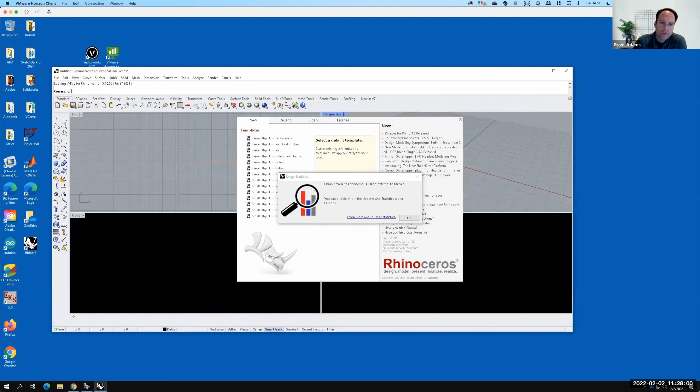Perfect. Now for this file, we don't already have a predefined template, so we're actually going to start with a brand new file here. Let me close everything up, and I'm going to dock my VRay right there at the top, and let's go ahead and maximize that.

On this brand new file that opened up by default, if I look down here at the bottom, I can see that it's set to be in millimeters. So that's not the unit I want to be working in, I want to be working in feet and inches. So I'm going to go up to the Tools menu and go to Options. Tools and then Options.

And I'm going to look for units. There it is right there, units. And I'm going to change to inches. Once that's changed, I'll go ahead and say OK. And now my scene is in inches, so when I start working, I'm going to be working in inches.

So we're going to set up this primary view, and what I'm going to ask you to do is work in the perspective view today. So I've double clicked on the perspective viewport, and that's what I'm seeing here. I want you to create a composition of 5 objects.

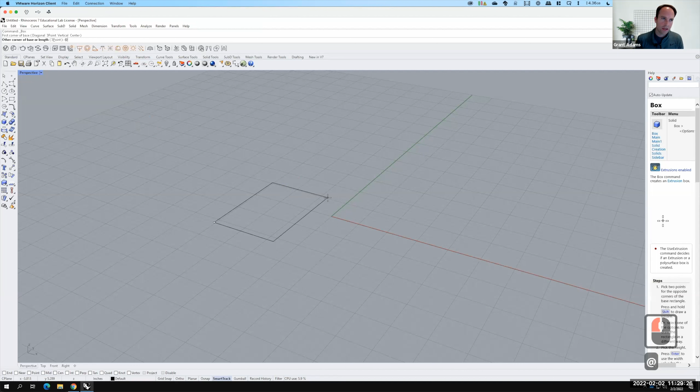These objects don't need to be anything particular, but let's start with like a cube. So I could use my coordinate system, I could say at 4 feet, 4 feet to create that first cube, and then we could say maybe it's 4 feet tall, like that.

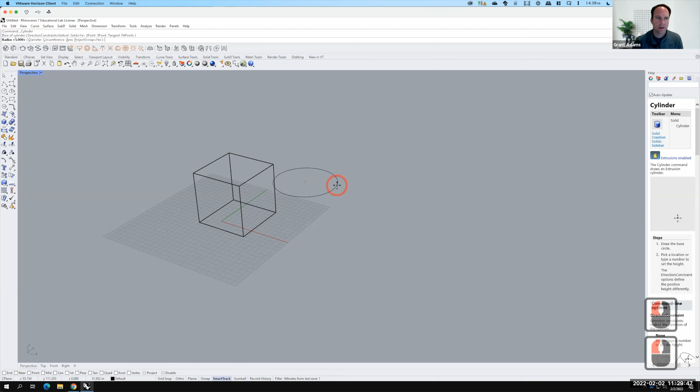And then maybe I'll create a few other objects. I'm just using these solid primitives. So I did the box corner to corner. Maybe I'll do a cylinder next. So let's click maybe here as our center, let's do a radius of 2 feet, and we can do a height of, I don't know, 6 feet.

And then I can come over here and choose a different, I don't know, let's do a sphere, and we'll do a radius of 3 feet. And then maybe I'll create, let's see, what else do we want to create here?

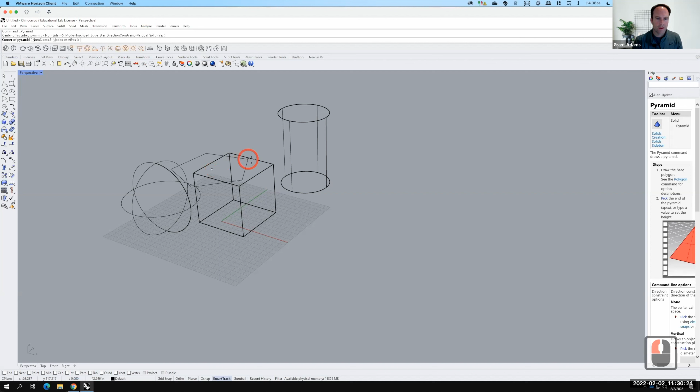How about a pyramid? Sure, why not? Now in pyramid, I can choose the number of sides, right now it's set for 5. I could set 4, depending on what it is that I want. 5's fine, and we'll put this one back here behind our other objects, and then we'll give ourselves a little bit of height there.

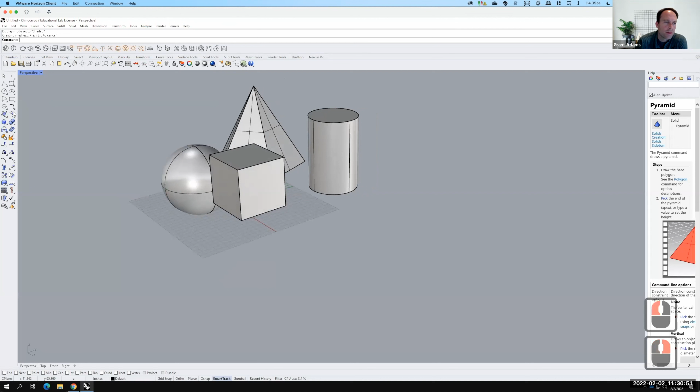Now if you're struggling to see what's actually happening in this scene, it might be helpful to look at this as a shaded view instead of a wireframe. So I can change that by clicking on the arrow next to where it says perspective, next to the viewport name, and I can change from wireframe to shaded. And so that gives me 4 objects. Let's just do another box over here, we'll do a longer, skinnier box.

And there's my 5th object. What I want is to arrange these so that I have a nice little perspective. Notice that my sphere is actually sitting low, so I might want to move that one up. So I can take this sphere.

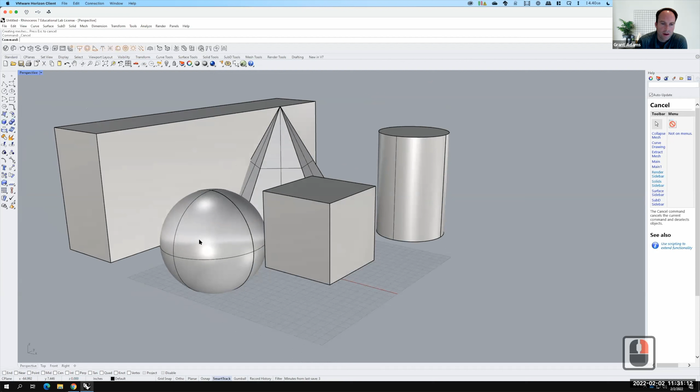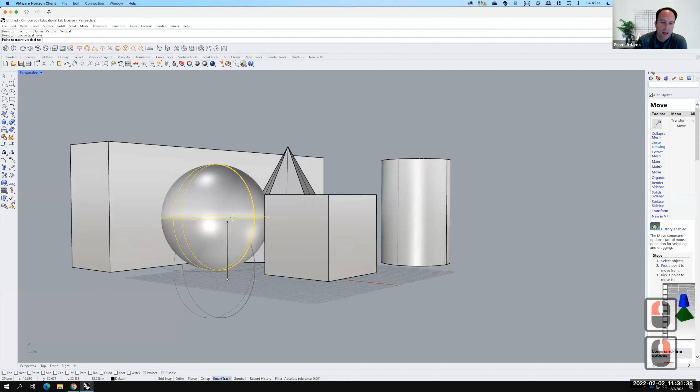Now, if I just go to transform and then move, it's going to move only in the X and Y plane, not vertically. So when I initiate the move command, if I look at my command line, one of the options is vertical. If I click on vertical, I can then click and move it up in space, moving it vertically rather than in the X and Y plane.

So there it is. Now I'll just adjust my view a little bit. We'll do something like that, and that'll work. Before I do my rendering, I'd like to save this view so that I know this is the view I'll always have when rendering. Actually, let's move this over just a little bit, maybe like that, just adjusting my composition.

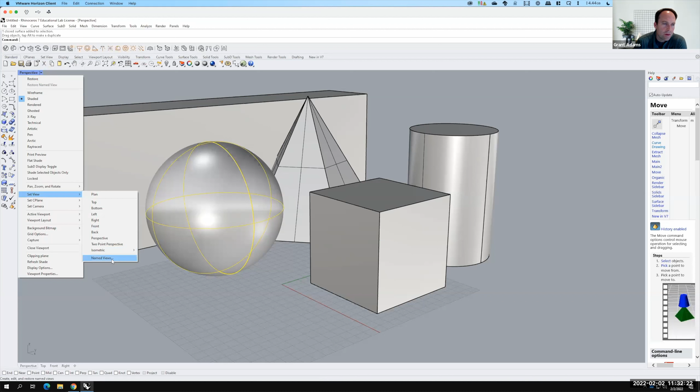I'd like to save this view so I can come back to it again. I can do that by coming up to the viewport name where it says perspective, and click that down arrow. Then I go to set view and then named views. This brings up the named views dialog box, and you'll see there's the disk icon for save.

So let's save this as render1. I've typed render1 there. I'll say OK, and you'll see that instead of perspective as my viewport, it's now called render1.

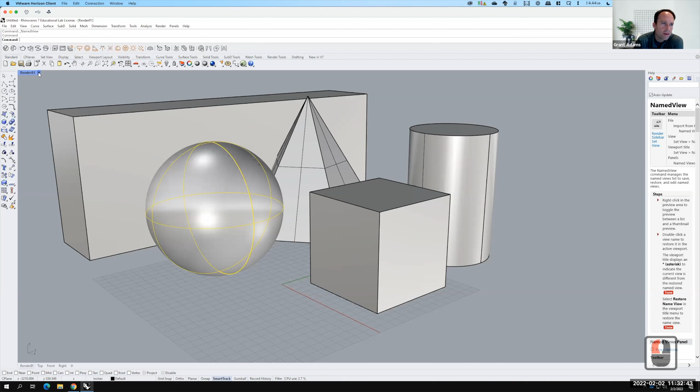The advantage here is that if I move this and then want to come back to render1, I can go back to set view and choose render1, and it'll jump me back to that view. It's just like if you worked in SketchUp and saved a scene there—this is essentially doing the same thing, saving that particular scene.

So what I wanted you to do was create this basic composition of shapes, and we're going to play around with VRay and actually render out these shapes. I can pull back up my little walkthrough here, and we're going to go through these basic setups, then I'll spend a lot of time working through the VRay asset editor explaining what's going on. But in order to get a good rendering, we need there to be some kind of ground established.

Right now we only have our objects. I'm going to look over here at my layers—I've got one default layer. I'm going to go ahead and create a new layer by clicking this new layer button, and we can call this ground, or what I tend to call it, IP for infinite plane.

So that infinite plane then is going to become my ground. I'd like that to be the active layer, so I'll change my check mark so that the infinite plane is the active layer. Then I'm going to look in my VRay tools.

When I look up here in my VRay tools, I'm going to look for a little symbol that looks like a rectangle with 4 lines off of it with a little infinity sign in it. When I click on that infinite plane tool, it's going to create an infinite plane. Oh, look at that—please choose VRay as your current renderer.

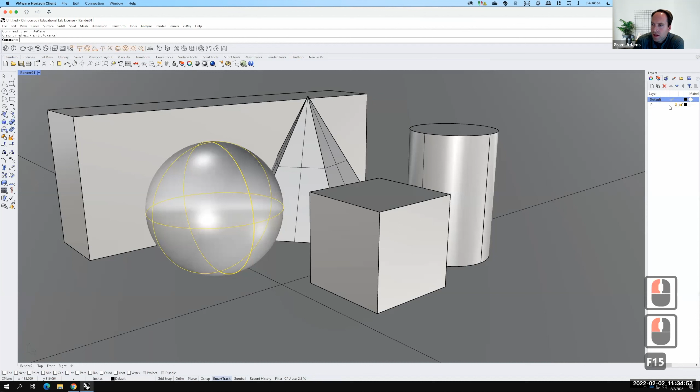Once I have that ground, I'm going to change my layers back so that I'm on the default layer, and set that as my current layer. Then over here in the infinite plane, I'm going to click the little padlock icon to lock it. The reason I lock it is I don't want to accidentally move the infinite plane—I just want it to sit there in the background. So now that it's locked, I can't accidentally move it.

So I've got an infinite plane set up, but I currently have no light in my scene yet either. So we're going to create a light called a basic directional light, available right here using the directional light tool. But I think it's really hard to create a directional light without a little guide object, so what I tend to do is create a box. I could use this box I already created, but we'll make another little one over here.

I create a box, and then when I choose the directional light, I'm going to snap first. It asks me for the end of the light direction vector. Let me turn on my end snap here. I'm going to orbit and choose that point right there, the lower point of my box. Then it asks me for the start of the light direction vector, so I'll choose the opposite corner of the box.

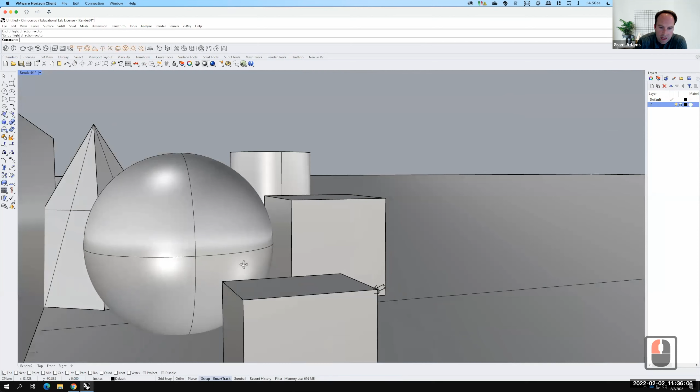What that does is allow me to create that light so it's pointing down toward my scene. If I were to create a light without using that box, I could say okay, there's my start, and maybe there's my end. What ends up happening is I have a light that's perfectly flat against the ground plane, and I really don't get good results out of that light.

So let's go ahead and delete that one. We'll leave this light here in my scene, and then we'll go ahead and delete this square because we don't need that anymore.

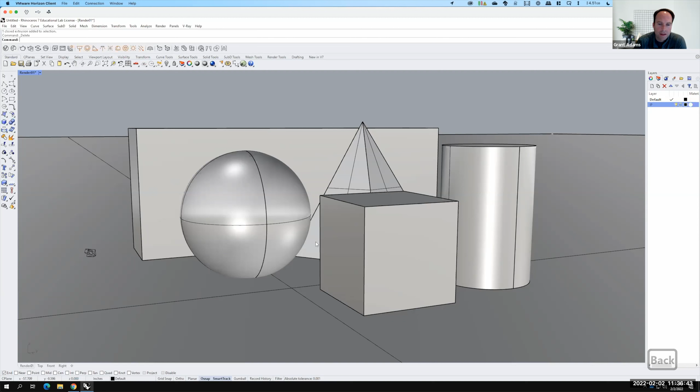Now that I have that and I have my light, we can go ahead and perform my first basic rendering. So if I go to render 01 and come back here to set view, and go to render 1, we'll reset my view to that saved view so they're all the same. I've got my light installed. That's good, and now we can go ahead and do a test render.

Now it's probably not going to turn out very well because we haven't set any options in VRay just yet, but let's go ahead and give it a shot. I'll click on this teapot icon and I'll go ahead and click render. And lo and behold, I didn't have very good results just yet.

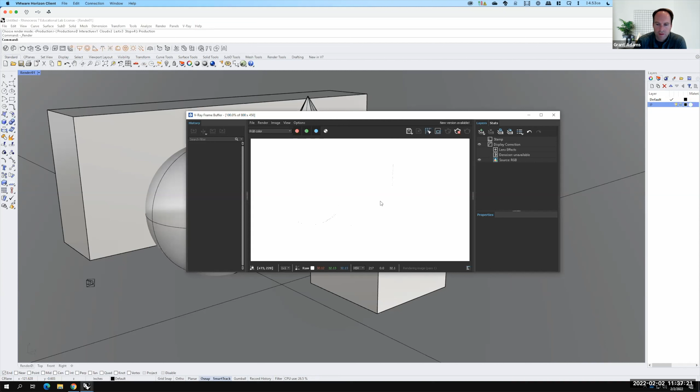So that's okay, let's go in and start looking at the VRay rendering options. What I'll do is click on what's called the VRay Asset Editor, which is this sphere right here, and that brings up really everything that you need to know about VRay.

I have a little daughter who decided to come join me right now, so give me one second to take her back inside. I'll be right back, hold on. Sorry about that, that's the consequences of being on Zoom. I'm sure it won't be the last time.

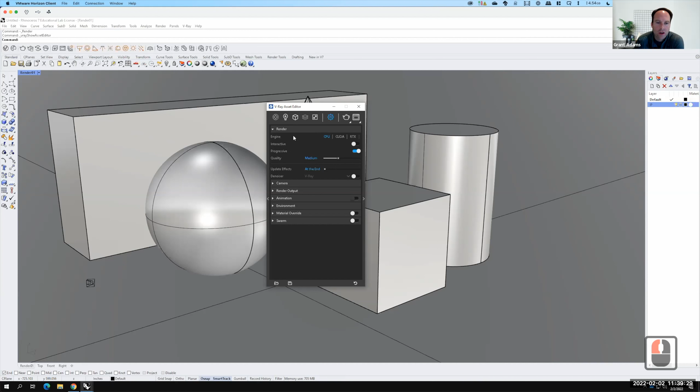So we have a couple different kind of setups. The first thing I want to do is go to the gear icon, and this is going to go through the basic settings of VRay, and allow me to look at what the default options are, etc. If you're ever struggling, sometimes the easiest thing is to just reset and revert to the default settings. A few of you have done that already, so you can always revert to defaults and start fresh on your settings.

These should already be the default settings, so I'm not going to worry about it just yet. Under the first little drawer, I have my render engine, which is currently using the CPU. I'm not doing any interactive rendering, so that's turned off. We are going to leave it as progressive, and my quality is set to medium, which for our purposes right now is just fine. When we get to final renderings at the end of the semester, we may bump that up a little bit.

I can close that little expansion and open up the camera expansion. This is where we control what the camera looks like, how a scene is exposed. This value here, this exposure value, is really the one thing you're going to be changing, and it's going to control how bright or dark the rendering is. I would suspect that if I change this number to about 13 or 14 right now, we'd get much better results in the rendering. Let me show you.

So I've changed that to 14. I'm going to click on the teapot icon.

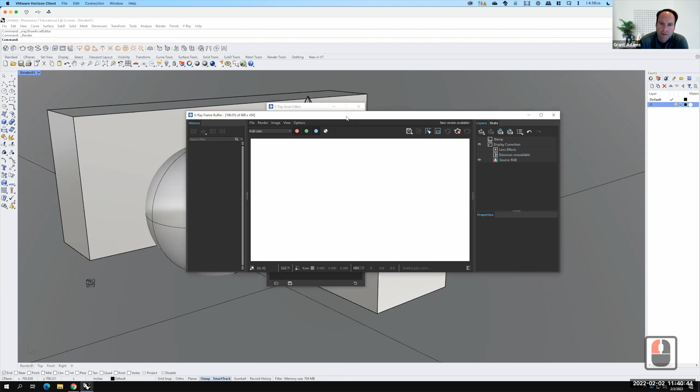And it's still way too bright because I have no materials, but at least now we're seeing some of the shadows starting to appear. So we'll leave that there at 14, and we'll keep coming down here.

I do have the ability to play around with depth of field. We'll get to that much later in the semester.

Let me go ahead and close the camera drawer, and we'll open up the render output drawer. There we go. This is what is actually rendering.

My aspect ratio is set to widescreen. What I tend to like to do is just match the viewport, so what I see is what I get, which is good. It's giving me an aspect ratio of 2000 by 1074. That's fine for our purposes.

It's still going to render pretty fast. Sometimes when you do your renderings, you might want to switch over into custom and then change this image width and height. Let me go back to the viewport and see if I can change it there. Match viewport - yeah, I can still change it there. I can drop the size of the rendering way down just as a test render, but that's when things get long in rendering.

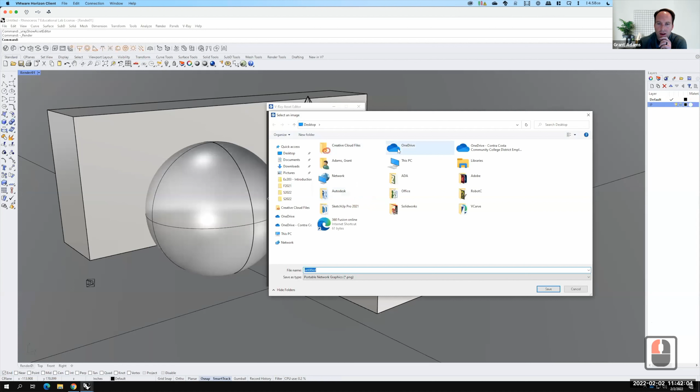The other option I have here is to actually save the image. So I can turn this on, and that would automatically save the image to a path that I specify. I could come over here, go into my OneDrive, and save it into my OneDrive folder. It's not a bad idea to protect yourself, but for our purposes right now, I'm not going to turn it on. We're not dealing with any animations yet.

We're not addressing environment settings yet, we'll get to that. Material override takes away all the materials and gives us just the default material. And the VRay swarm allows us to use multiple computers to do rendering. So those are things that we'll touch on a little bit later.

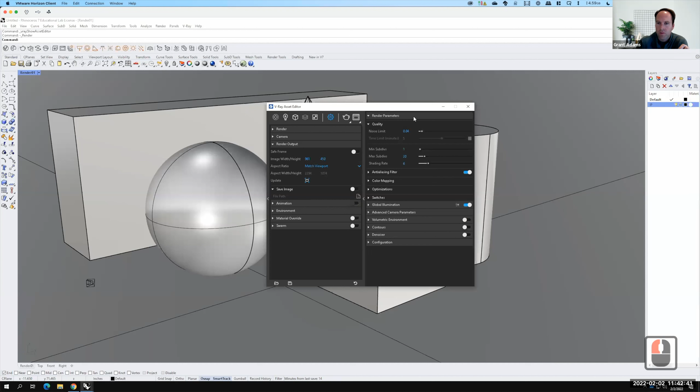All that being said, there's also a whole series of options in the drawer to the right. If I click that little arrow on the right side, we get a whole other set of options. So we have render parameters, and this is starting to get into very specific information. We have global illumination, we have how the renderings are going to happen.

We can turn on a volumetric environment - that basically is like fog. These are all settings that we can play around with. We're not going to get to those today, but I like to point out that they're there.

Brooks is asking if the shapes that I did in Rhino are solid objects. Everything that we draw in Rhino is what's called a NURBS object. It's defined as a surface, and so we're viewing it as if it were solid, but it is in fact hollow inside.

Rhino defines it mathematically as a surface, so it's not like SolidWorks where it's considered a solid object and you're pulling a chunk out of that object. But that also, because of how it's defined, gives us infinite flexibility over the complexity of a particular surface and how smooth or not smooth that surface is. So they're not solid objects.

It's a great question. Okay, so I have my basic render settings established. Now we're going to start talking about materials.

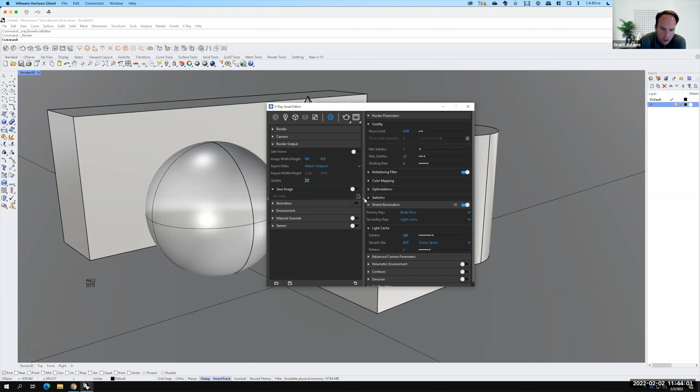Sounded like I had a question. Yeah, do you mind showing your settings for the render part again please? The render what? The settings for the render part. The render part, doing, right? Yeah, sure, can you still see my screen? Yeah, okay, so my settings for the render part right there, right?

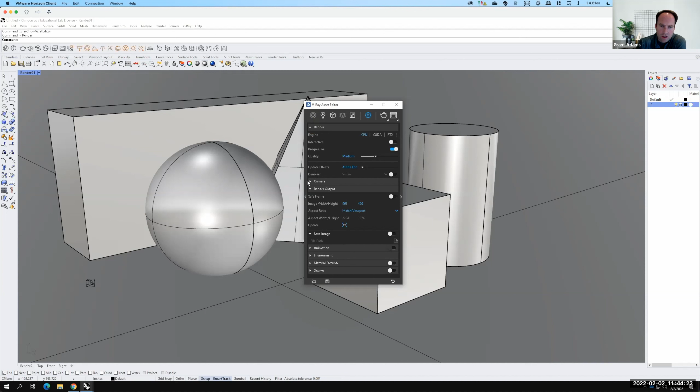These are all basically defaults, so we're leaving the quality at medium for right now. The next one, camera, right? The only thing I've really changed so far is the exposure value, and I bumped that up from 10 to 14.

All right, cool, thank you. No problem. I also had a question on how to save it so that it opens in Rhino and not an image.

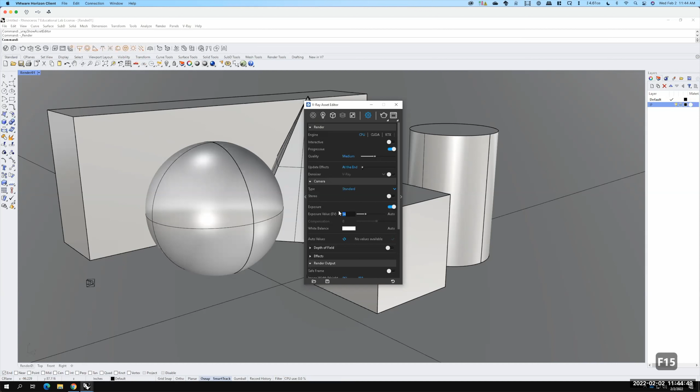When you're saving your Rhino file? Yeah, is there a way to save it so that it opens into Rhino? Yes, yes, I'll show you that. Basically in Rhino, all you need to do is go to File and then Save. What Rhino is saving is a Rhino 7 3D model, so it's going to be a .3dm file. That will always open Rhino when you save that. So I would save that, and actually it's probably a good place for me to stop and do it anyway before I lose things. Let me go into today's folder.

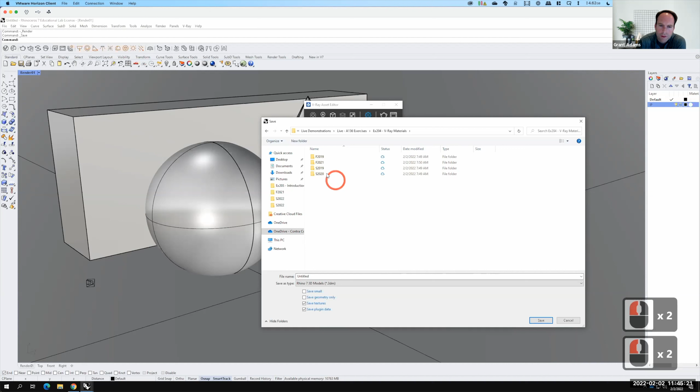I actually need a folder for today. Here we go, spring 2022. Ex204.

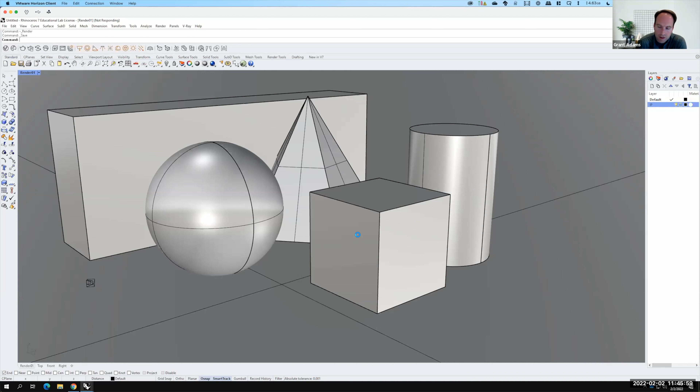Let's go ahead and save that. So that Rhino 3dm file, if I were to close Rhino and then double click that file, it would open and give me this exact same scene. It preserves everything in Rhino, but it also preserves all the VRay settings. Even though VRay is a plugin for Rhino, it will save all the VRay settings with your file as well.

Let me get open the VRay asset editor again. There it is. Now, if I expand the drawer to the left, this side, this is all about the materials that are there. By default, none of the materials have been downloaded. This is one of those things that's so frustrating because they didn't do it before they imaged the machine, so every time we have to do this when we log in.

There's a button here for download. If I click on download, it will start downloading the whole texture pack that comes with VRay. This will take a few minutes to download. In the meantime, I'm going to go over to this first button here, which is the materials button, and when I click on that, I have the ability to create a new material. We'll get to using the actual live materials here.

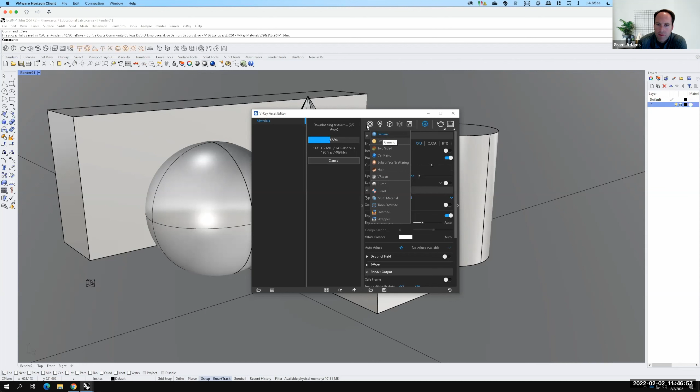But I'm going to create a new generic material. I click on that materials button and I'm going to click on generic. When I do that, it's listed as generic. I'm going to rename it. We'll rename it to be red. So I've created a material called red.

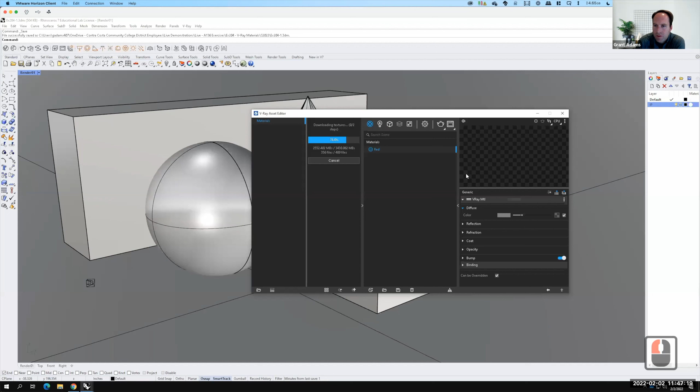If I expand the drawer to the right now, I can see specific properties about my material. So the asset editor gets complicated because there's drawers out to each side. The red material, I can see a preview here, but it is currently just gray. The color of the material is identified by this diffuse setting. So right now the color is set as gray. Let's go ahead and change that color to red.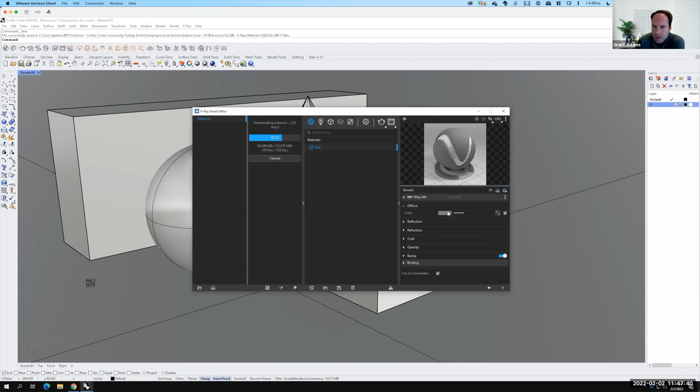So I'm going to click on the gray area here and we'll change this. You know what? I want that color to be red. You can see that I can pick any color of red that I would want. And when I've picked red, you can see that my material updates to be red.

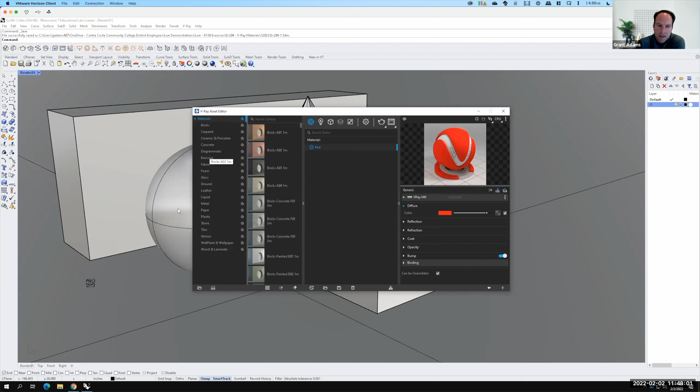Now, if I want that red material to apply to one of my objects in my scene, I can click on that object, and then I can right click on the name of the material here and say apply to selection. I can also apply to a layer, but for our purposes right now, we're going to apply to each object. So I'm going to apply to the selection.

And there we go. So I've applied it, and the logical question is, well, wait a minute, why am I not seeing it? That's because the view mode that we're looking in right now is just shaded. It's giving us generic objects. This is great for modeling, but not so great for materials.

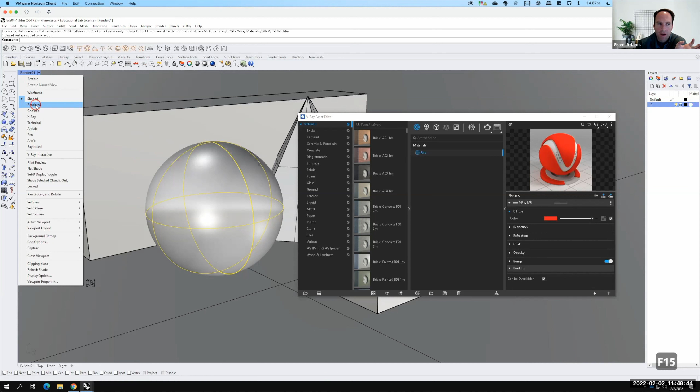So I can switch from shaded mode into rendered mode. Now, sometimes the rendered mode works wonderfully, and sometimes it doesn't work at all. A few of you ran into this problem where you tried to do rendered mode and it just turned black on you. That can happen. Usually when you have a light in the scene, like the directional light that I installed earlier, we won't have it just turn black, but be aware that sometimes it does in fact happen.

So I've created one material that's red. The rest of my preview is showing as white. Let's go ahead and create a few more materials. So I'm going to create another material. Now this time, when I click on that materials button, I already have a material, so I actually need to come all the way down to the bottom. There's a little plus sign where I can create a new material. There we go, generic.

This time, instead of being red, let's call it blue. You kind of see where I'm going with this. Let's change the material color to be blue. So I'll come down here on the color picker and I'll pick blue. We can see that it updates, and I can pick my object and I can right click and say apply to selection. So now I have a red object and a blue object in my scene.

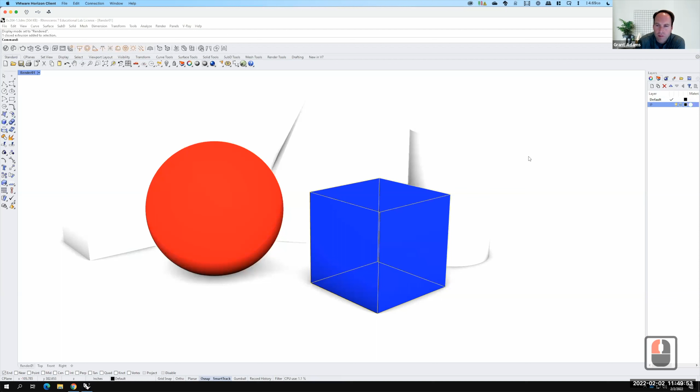I still want to fill it out with some more colors. So let me go back to the V-Ray asset editor and click on the plus sign. I'm going to go to materials. I'm going to go to generic. And I don't know, I'm not sure what to name it because I haven't decided yet. Let's say this is green. So let's pick green there. And we'll rename that material to be green.

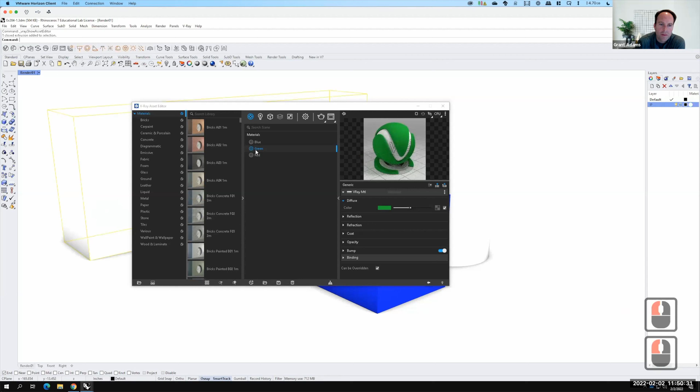Perfect. And we can assign that material to another one of my objects. Let's right click and say apply to selection. And now that object is green. So we'll do this 2 more times with 2 more colors.

Let's go down here and create a new generic material, and let's call this one orange. We'll change the color to be orange. There's orange. Let's apply it here. I'll right click on orange and say apply to selection.

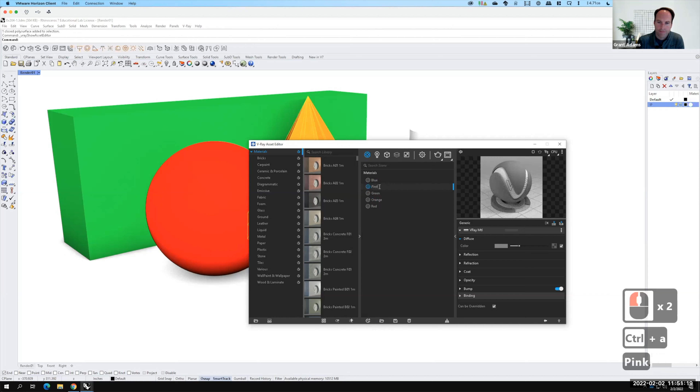And we need 1 more material. I'll come down to that little plus sign, go to materials, generic, and let's call this one pink. We'll change this to be a pink.

So we'll use that last cylinder. We'll right click on it and say apply to selection. So now all 5 of my objects have a material assigned to them.

So when we go in and do the render, if I click on the teapot icon, we should be able to see all of my materials nicely. We'll let the rendering progress a little bit, and this is where some patience is good. We could see that we're actually getting shadow being cast off of these, and a little bit of shadow on the curve there.

And we can see down here at the bottom that my render now says finished. That means that the render has completed, and I can go ahead and save it. There's a disk icon here that will allow me to save my render. I'm going to click on it, and it's going to bring up the choose output image file.

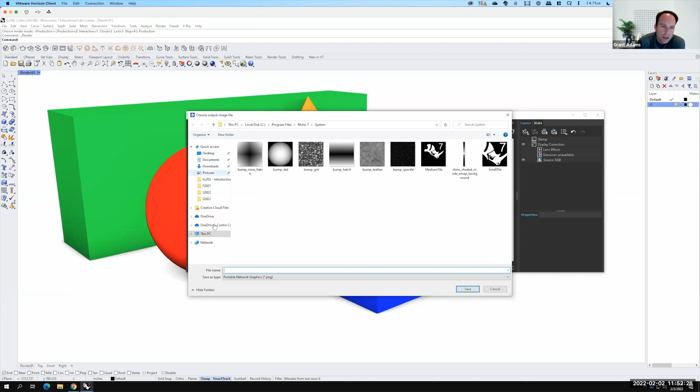This is where you want to put it. And I'm going to go into my OneDrive. Let me go into today's lecture. Brooke, I'm going to get to your question in just a second. And let me go into here.

Okay, so this is my first example. I'm going to change the save as type to be a JPEG. The PNG is fine, but sometimes the background becomes transparent and you get a black background and what have you. So let's change it to a JPEG, and we'll call this exercise 204, and this is 1.

And we'll click on save. And that saves a JPEG, and that's what I'm going to post. This is one of the things that I'm going to post to Canvas.

So now Brooke's question is a really good one, and that is, can we mess around with other settings making the new material? So that's where we're going. We've created the materials to start with. Now we're going to start changing settings so you can see how these materials change.

So let's go to the V-Ray asset editor, and I'm going to pick the blue material to start. So when we have the blue material here, we've changed the diffuse color. But you see below that, I have other options for what's happening in this material. So the first option would be my reflection. If I expand the reflection, I can actually assign a reflective set of group of settings to it.

So we're going to come down here, and then we're going to change the reflection IOR value. So that's what we want to start with. So I'm going to click on it, and of course it's not letting me. Let me see.

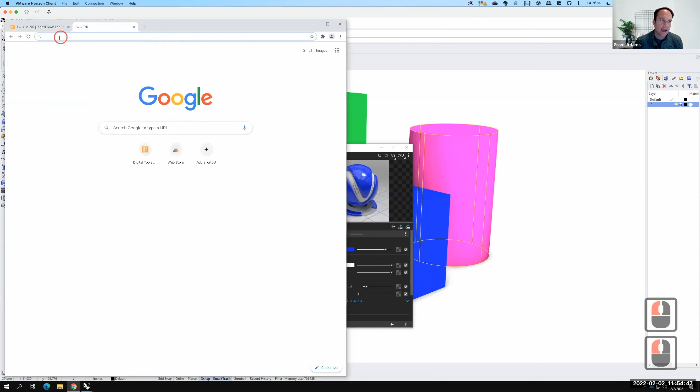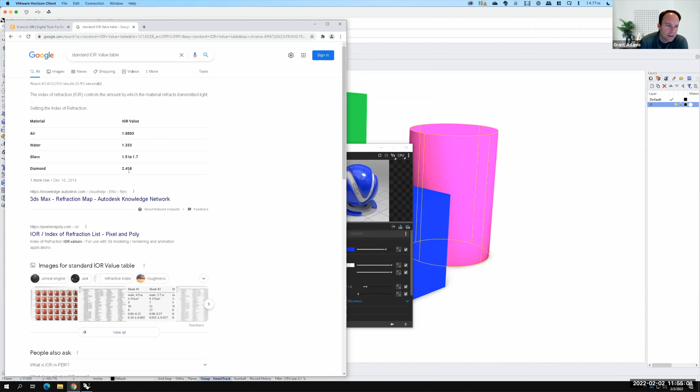And you can see that different materials have different IOR values. So glass, for example, is somewhere between 1.5 and 1.7. A diamond, 2.418. Right? So we can actually go here. This is a list of IOR values for known materials. So we can scroll down here, and depending on what material you're trying to create, titanium, for example, 2.16. I don't even know what some of these are. Chalk, 1.51. Right, so there's all kinds of different examples here.

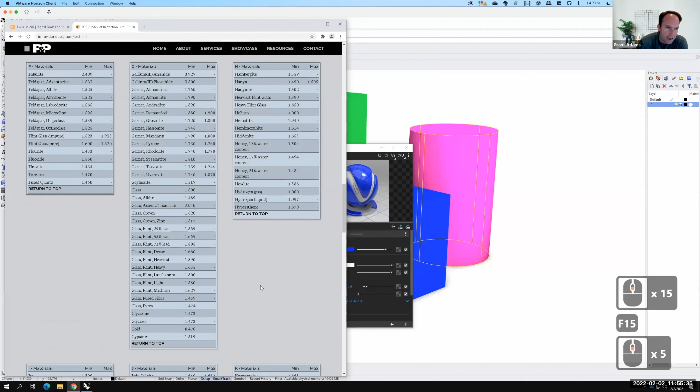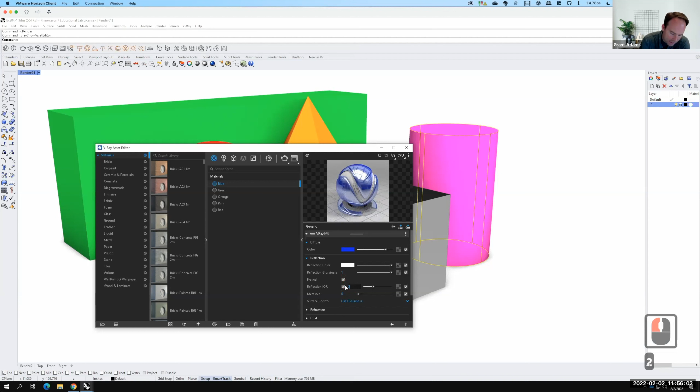So now that we've turned that on, I want you to mess around with the settings. That one's at 1.6, but let's say we went to, say, 4. You can see how much more reflective that material becomes. If we were trying to create a chrome, a really polished material, we'd go all the way up to maybe 8. This is blue tinted chrome, very, very reflective. A diamond is 2.4, so let's leave it at 2.4.

And there it is. We can do this for other materials. We've got it set for the blue. Let's go to green, open up reflection, and turn that one on. Let's change the IOR to, maybe, let's go to 1. No, that's not reflective at all. Let's go to 1.1.

So that's more like plastic would be, where we have a little bit of reflectivity but not too much. Maybe 1.2 shows it a little bit better. Yeah, just a little bit. So we're able to control how much reflection these various materials have.

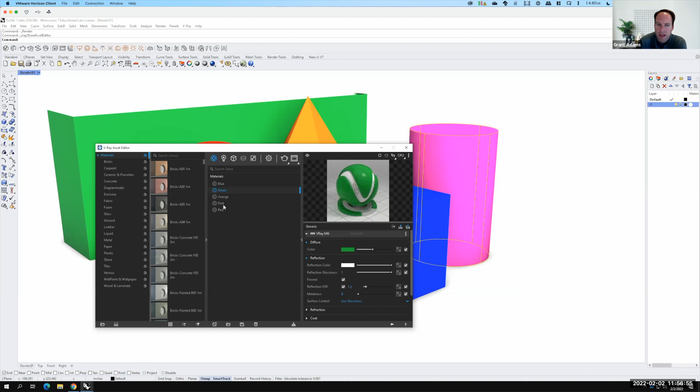We could go over to the pink one here. We could turn on reflection for the pink one, turn on IOR, and we'll leave that one at 1.6. Okay, so that's the reflection of a material.

Let's close down reflection, let's close down diffuse, and let's move down to the next one, which is opacity. It used to be called transparency, now it's called opacity, and we can control how much opacity this has using this slider. If I come down here, you can see that it's more transparent. And if I come all the way down to the bottom, it's completely transparent, regardless of color.

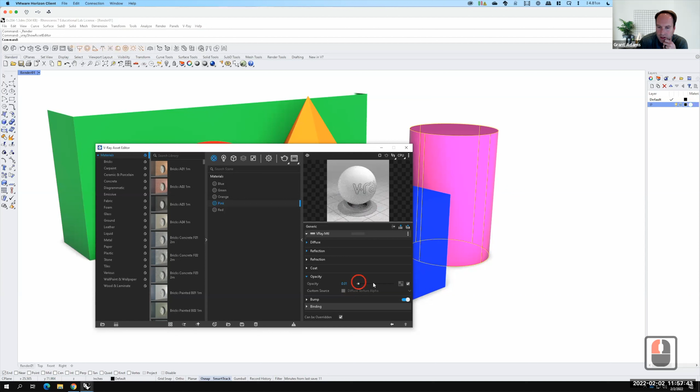So let's set this one about halfway, maybe like that. And then let's go ahead and perform an actual rendering and see what it looks like.

As it's rendering out here, you can see that these objects are still relatively solid, but the blue object is now reflective. It's reflecting the ground that's white. It's also reflecting this ball, and it would be reflecting on the backside. There's a little bit of reflection on the top. That's normal. We'll let it finish its rendering.

There we go, it's finished. I'm going to go ahead and save this. So this is my second image. Let's switch it over to JPEG again, and we'll call this 204-2.

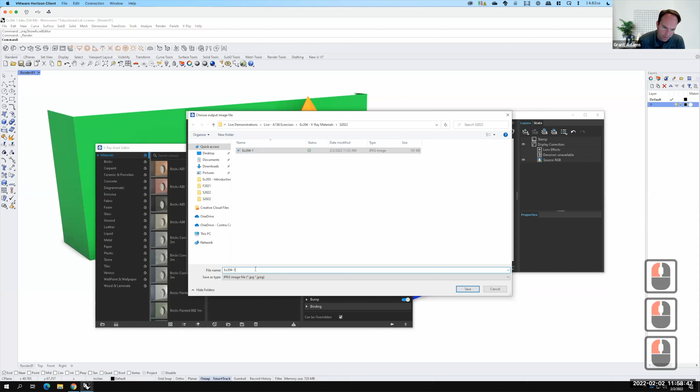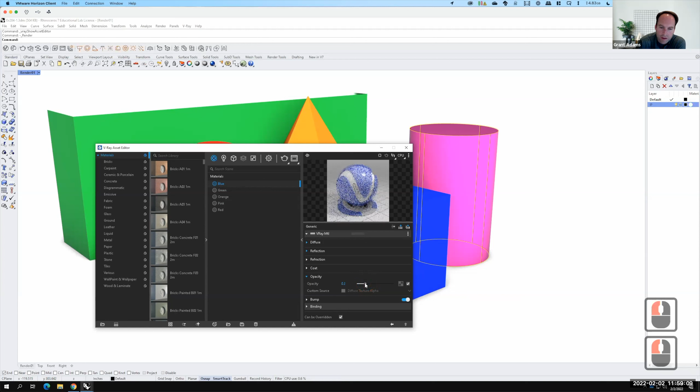There we go. And then I'll keep adjusting these settings. Let's play around with the blue one. I'm going to go to the blue. We can minimize these two, and we'll come down to the opacity, and let's adjust that so that it's much more transparent. Maybe like that. Now there's also a value called refraction.

This has to do with how light passes through clear objects. It's a little bit advanced for what we're doing today, but the best way of describing it is: if you had a glass and filled it with water, set it on your counter, and shined a light through it, the light would go through the glass, bend and hit the water, bend again, and then come through. So we can choose how that's happening in these various materials. It's pretty sophisticated, but we could by default just turn it on.

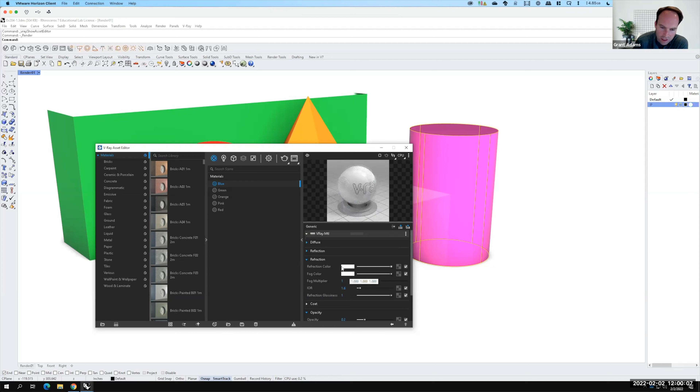Okay, you can see that it's becoming much more transparent. We're getting much less of the color there, and now it's becoming almost like an entirely glass object. I don't think it shows it well enough, and we're not going to get too much out of it. We could change the fog color to tint the glass a certain color, but I think this is getting above our heads for today. So let me keep that one off, and we'll stick with just the basic bluish color.

We're not going to worry about coating. Bump is a way of applying texture to an object. We're not going to worry about that just yet. We'll cover that more in a couple lectures.

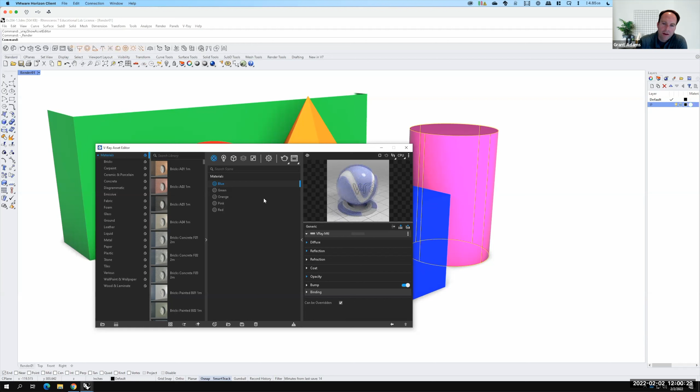So now that I've created that, let me go back into my orange. Maybe this one needs a little bit of reflection too, so we'll turn that one on. And let's come down here, go to opacity, and let's give it just a bit of opacity. And we'll perform one last render.

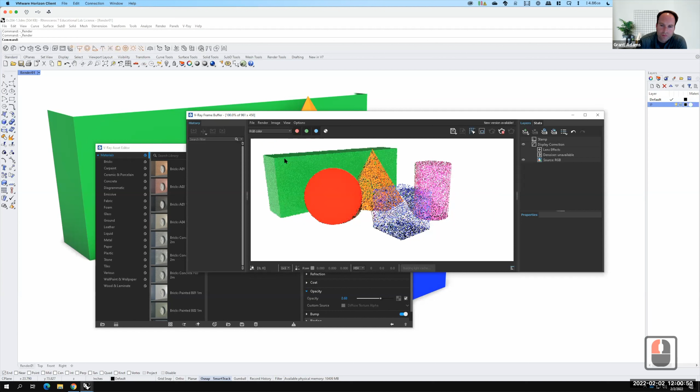So now we're seeing through the blue object. This actually brings up a good point. You can see at the bottom of this blue object that I'm getting kind of a weird pattern. Let me zoom in on it a little bit. I'm getting kind of weird lines and whatever. VRay does not play well when two surfaces are exactly coplanar, when they intersect exactly in the same spot. It gives us these weird artifacts.

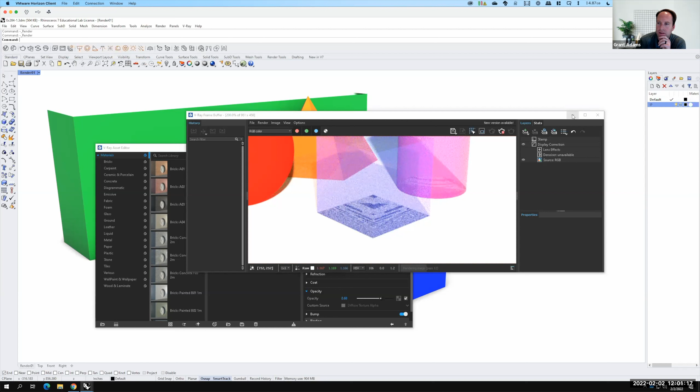So in this scenario, to eliminate that, I need to adjust that infinite plane or all of my objects. Let me switch back to shaded mode for just a second so we can see it. Let me close the asset editor and jump into the front view for a second. And we can see that the infinite plane, this line right there, is coplanar with all of my shapes.

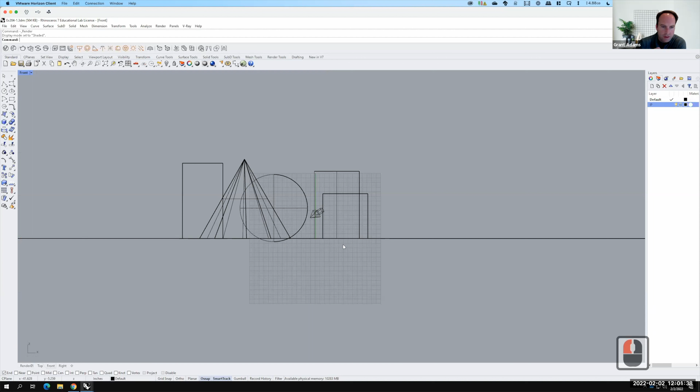So if I were to take all of my shapes and move them just a bit above the plane, you know, it could be as simple, let me turn on ortho here, as a 1/8 of an inch. So I could say 0.125 inches. It's just a whisker up there. If I zoom in like that, you can see there's that little tiny gap. Alternatively, I could move the infinite plane down by a 1/16 of an inch. I could also move it arbitrarily.

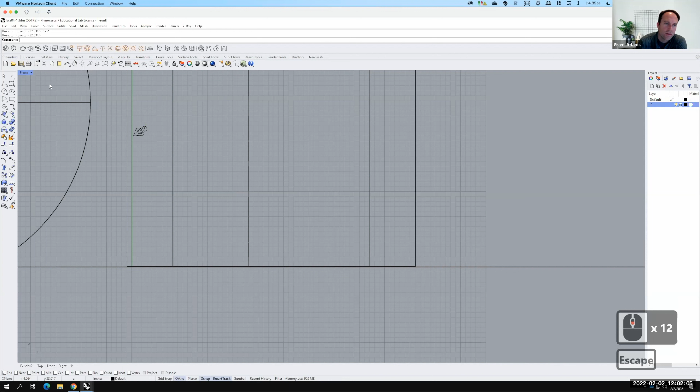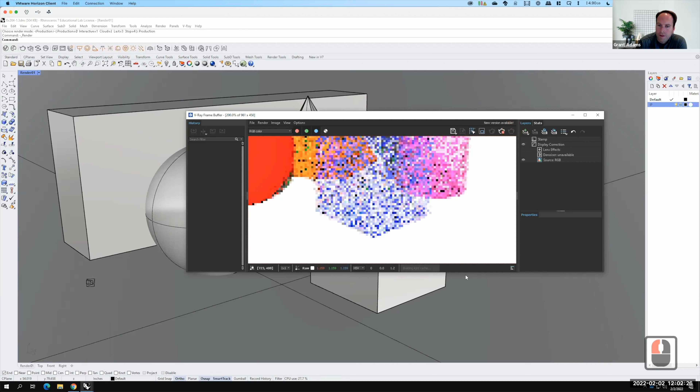Now, when I come back to my render and re-render that... let's stop the render, let's re-render it. We can see that that artifacting that was happening goes away completely. So we're not seeing it anymore. Let me zoom out. We can see our transparency. We can see that shadow there, which is really nice. So all of this is working well.

So as soon as this is done, I'm going to go ahead and save that image as well.

So you can see that when I add the reflections and when I add the transparency, the rendering time goes up. It takes much longer for the renders to finish. A lot more calculations to happen. VRay, by the way, will follow a beam of light up to 16 reflections. And that's part of how we get such accurate renderings long-term with VRay, because it's following that beam of light that many times.

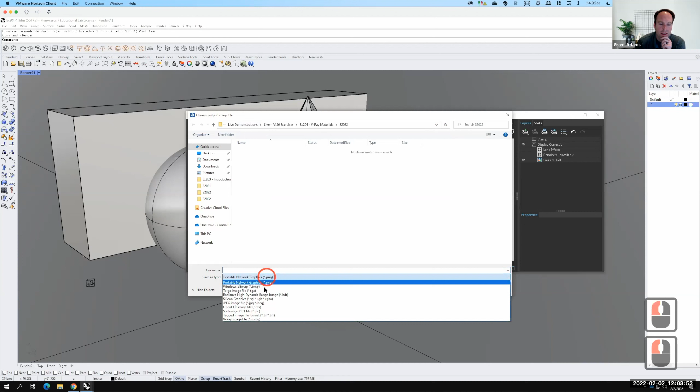So we're almost done here. There we go, and now we're finished. So I can go ahead and save this one as well. I'm going to save it as a JPEG, and this will be 204-3.

We'll click save. Now the next piece would be to take all of these objects and apply different materials to them. So we created materials from scratch, all of these, but you see that my material library has just finished downloading. And I mentioned this a little bit on the first day, but I can go into any one of these materials. I could use bricks, for example.

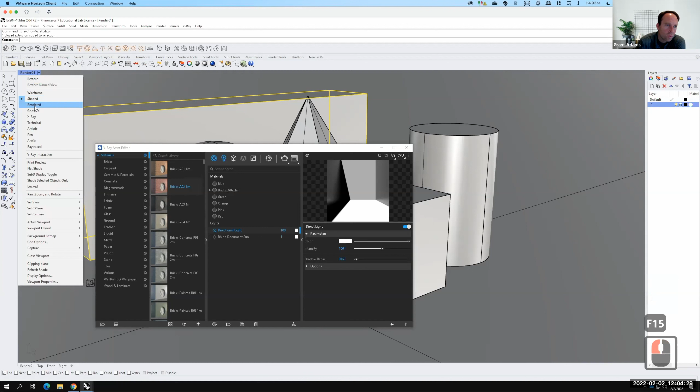I could select this wall, right click, and say apply to selection. And now the bricks are going to be applied on that wall looking object. If I switch over into rendered mode, we should see a preview of it. Now, they don't always look perfect when you apply a material, especially one with a pattern. That's something called texture mapping, and it's something we'll work on later on in the semester.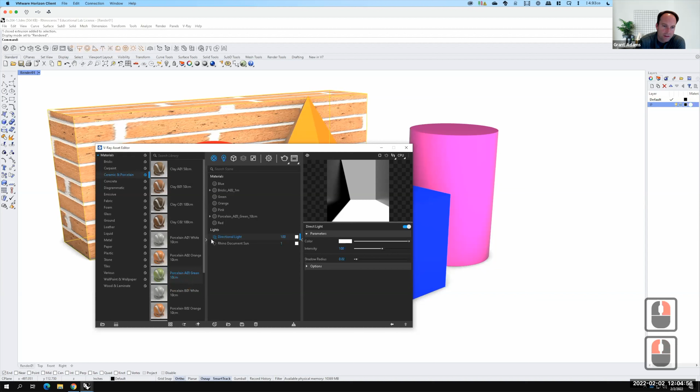So if you apply it and you don't like it, you could try a different type of material. I could come in here, for example, and apply a green porcelain. Let's apply that to the selection. And now I have a green porcelain. I could select this cone here, come down into leather, and apply black leather to it, apply to the selection.

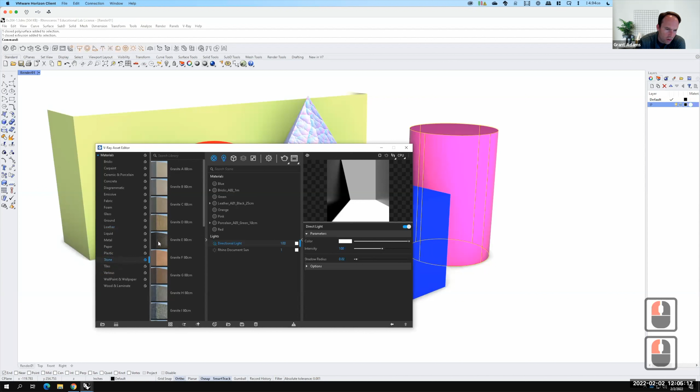I could pick this here, and we could get to, I don't know, stone, and apply granite to it, apply to selection. So I'd like you to go through and on each of these objects, apply a different kind of material. There's a blue foam, how about that? Let's apply to selection there. And the last one is this sphere. I don't know, we haven't done a metal yet, so let's do a metal, and we can apply to the selection.

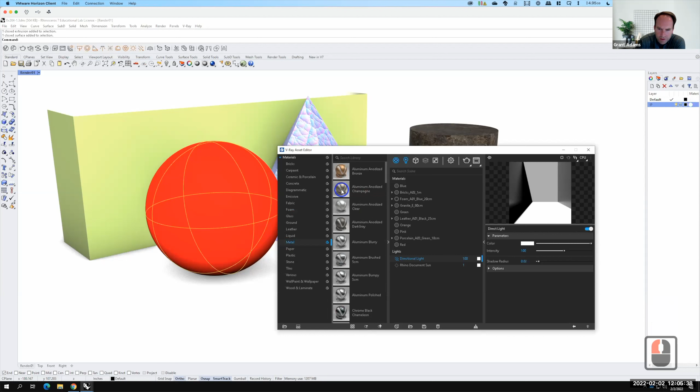So now that I've done that, we'll go ahead and render again. I'll click that little teapot icon and we'll render it out with actual materials on it. You can see there's problems with texture, like the leather is definitely too big, but if you zoom in on that a little bit, it really does look like leather. This really does look like granite. Again, we'll increase the size and quality of the renderings as we go forward, but this shows you how to apply basic materials to your objects. So I'd like you to go through and apply to all 5 of the objects different materials. And as soon as that's done rendering, we'll go ahead and save that as well.

Oops, sorry, we just need the regular save. There we go. Let's go into JPEG, and this is 204-4. We'll click save.

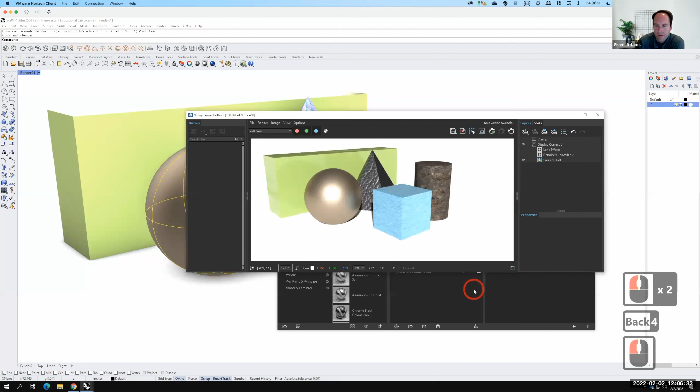So the last thing I'm going to ask you to do as part of your 204, this is hopefully going to work and hopefully you're ready for it. If not, that's okay. Let me go to File and then Open. I'm going to open my walls from last class, so let's go into my last class.

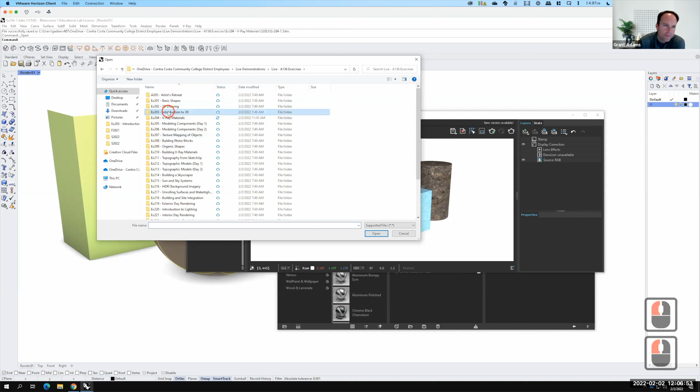Let's open up those walls. This is where, if it didn't work out, where you didn't save it or something didn't work the way you wanted, that's okay—you can just skip this part. I'll still give you credit for the exercise, but I'd like you to get to this stage and select the objects that are in this scene.

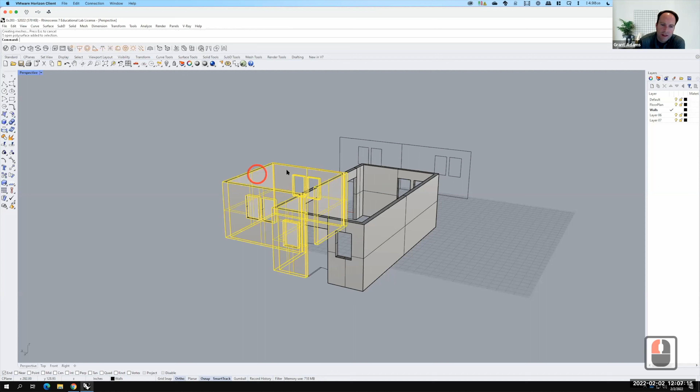So I'm going to hold down Shift here. I've got the tops of the doors and my walls, and then I'll apply a material to that. Let me open my VRay settings, go into my materials, and let's put concrete on these walls. Let's see if we have simple concrete, and I'll apply that to the selection.

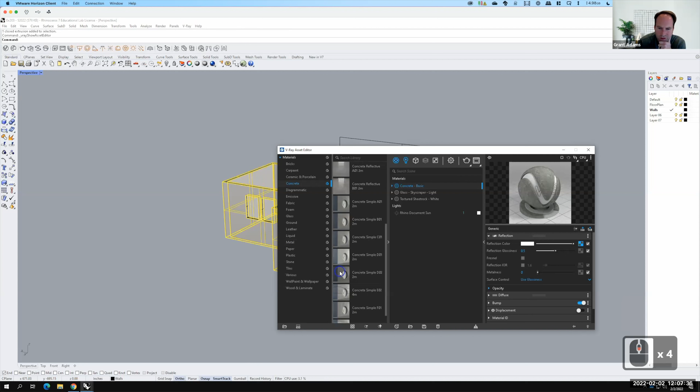Now I have a basic concrete applied. If I look at this in rendered mode, we should be able to see it. There it is. The texture doesn't quite look right, but I do have to set up a few more things like we did in the beginning.

I create a new layer and we'll call that layer infinite plane, IP. I'll make it active, and I'll create that infinite plane underneath my object. That's good—that gives me a ground.

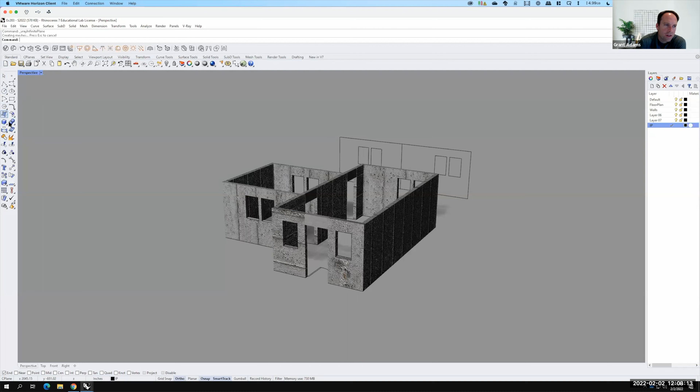The next thing I need to do is create that light—that's going to be my basic directional light. So I'll create a temporary little box like that, and I'm going to switch into shaded mode, because in rendered mode I won't actually see the light that I'm creating.

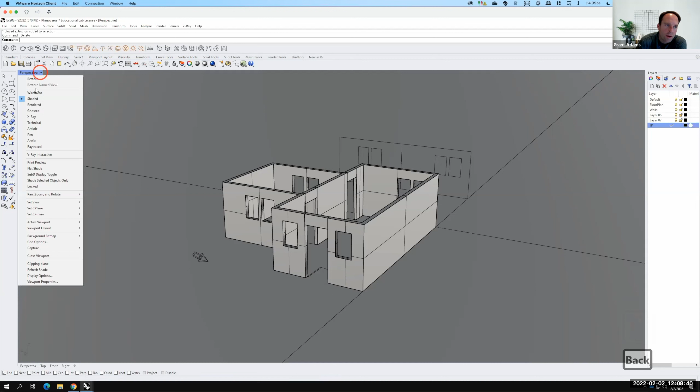Let me switch into shaded mode, and I'll click on this basic directional light, and we'll snap from the lower corner diagonally to the upper corner. Then we can delete the box, and that gives me my light. I told you it wouldn't show up in the rendered view—let me just confirm that. See how the light is no longer there in the rendered view? I wanted to make sure it was showing before I switched back into the rendered view.

Then we'll go ahead and check on my options here. Let's go to my settings. It looks like the exposure value is already set at 13.6. That should be okay, pretty close to what I want. Let's go ahead and render this.

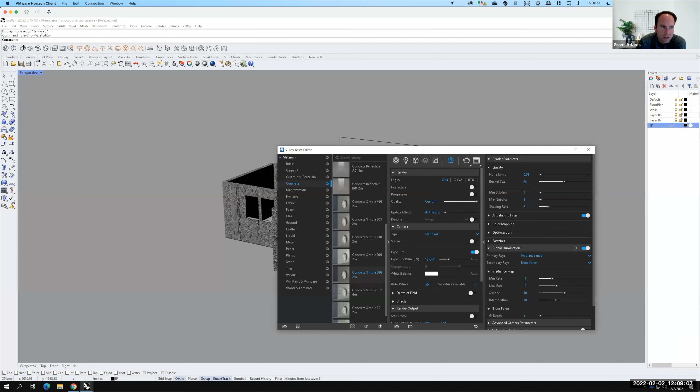So I'll click on the teapot. And it's rendered out—this actually has some older settings in it, that's why we're seeing a different style of rendering. Yours will be the new style of rendering. There we go, and we can see the shadow. So everything turned out pretty well.

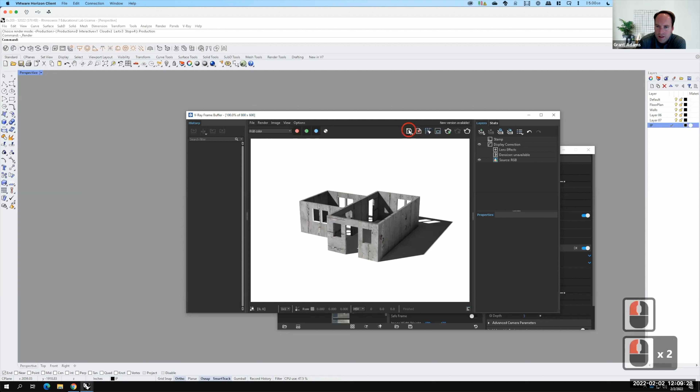I'm going to save this as my last file for today. Let me click on the save button here. We'll save it again as a JPEG, and this will be 204-5.

If you didn't save it, I'm okay. If you skip this or something doesn't work out and you don't do the material, that's okay. It's redundant—it's about learning how to work through putting the infinite plane in, getting the light in, getting the rendering started, etc. So play around with the materials, have some fun with it, enjoy making the materials more or less reflective, see what happens. Those are all good experimental things to work on.